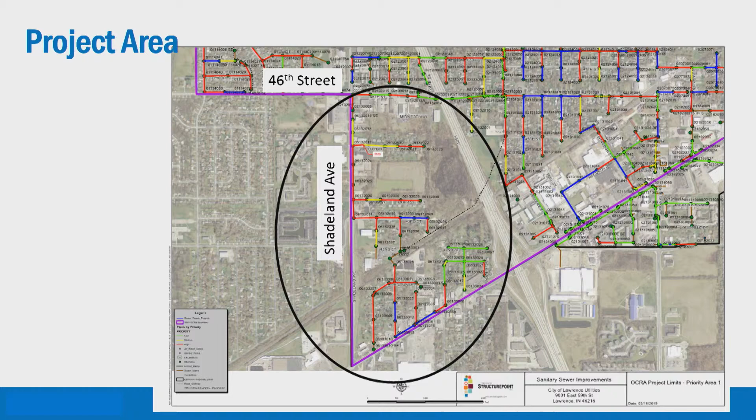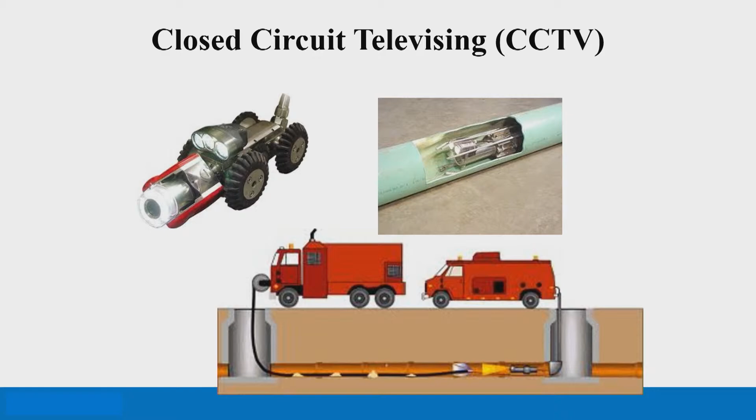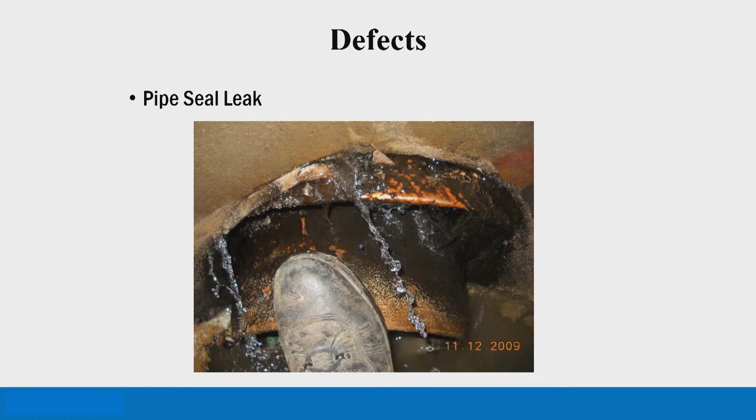So I'm going to go through some images of things we can see in the sewers. This shows water leaking in where a pipe enters a manhole. All of this water, if you haven't heard the term before, we call infiltration and inflow. That can come from rainwater or groundwater entering your sewer system, and that's extra water that the city needs to pay to treat. So anytime we can get this clear water out of the sewer, the better from a bottom line budget standpoint.

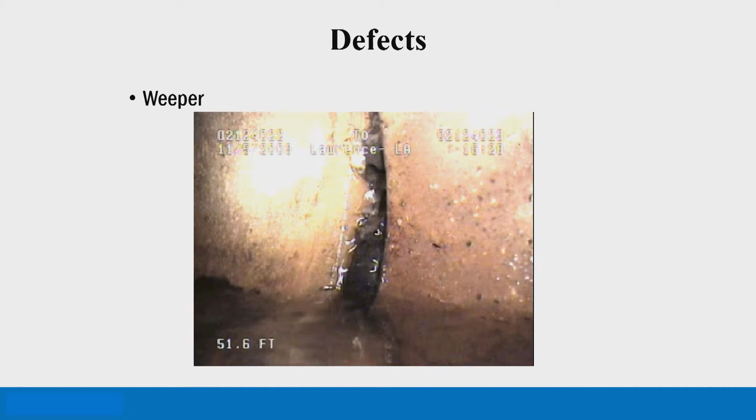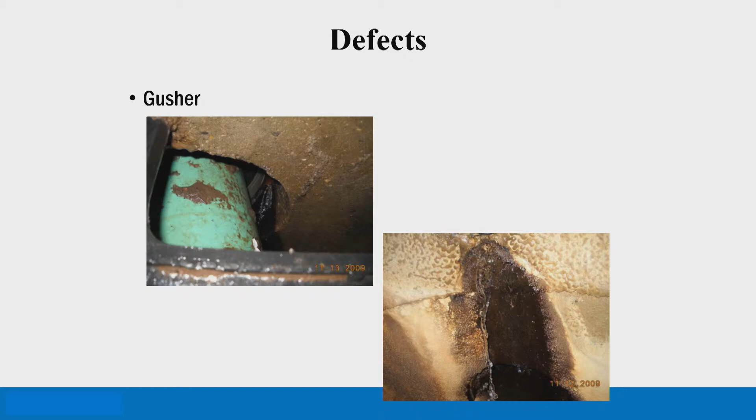There are different types of water that can come in. We call them weepers - like someone crying, a little drip. But then you can get water that's constantly flowing, almost like it's pressurized - again, that's groundwater coming in. We also see ones called gushers. In this area, we did see a lot of infiltration, a lot of clear water coming in.

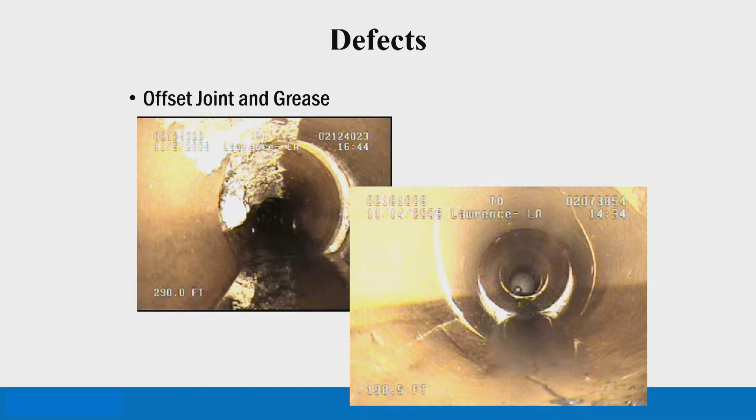We also see with this type of pipe material some offset joints, just as the ground shifts and over time the pipe shifts around, allowing movement of soil and water. And then there's grease buildup from people putting things down the drain, restaurants or other things, which can cause blockages in the sewer.

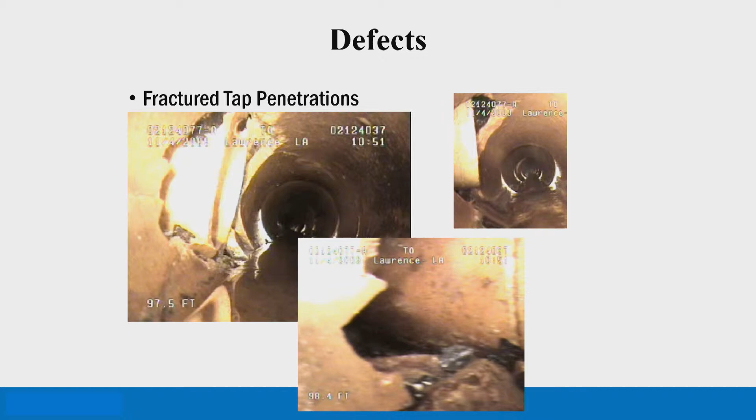Sometimes new developments come in and tap these pipes to put in new laterals, and they may not do it properly, so they can cause the pipe to crack and break around that penetration. The pipe, as it settles over time, can get fractures and cracks. And then gravel deposits, silt, sand - anything that comes in can settle out and take up capacity in the sewer.

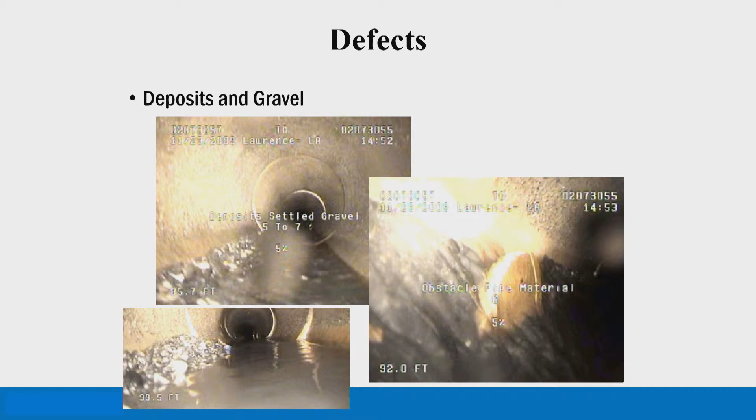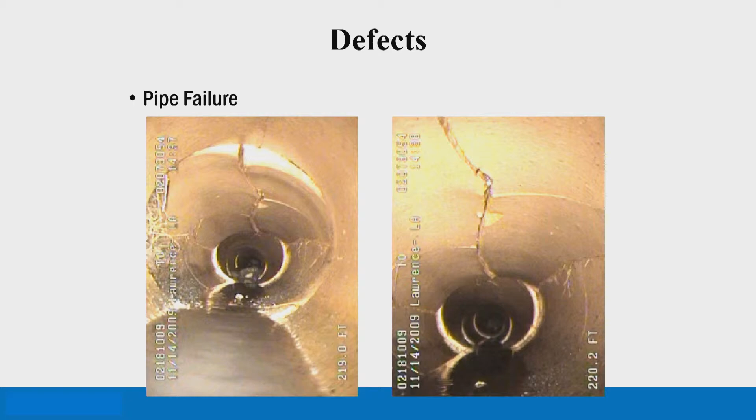There are a couple locations in this area where we saw some higher priority defects - we call these pipe failure. The sewer isn't necessarily collapsed, but it's getting to the point where you get a little concerned, especially in terms of a sinkhole or something forming above ground that you'd be able to see. I'll talk through how we'll address some of those we've seen.

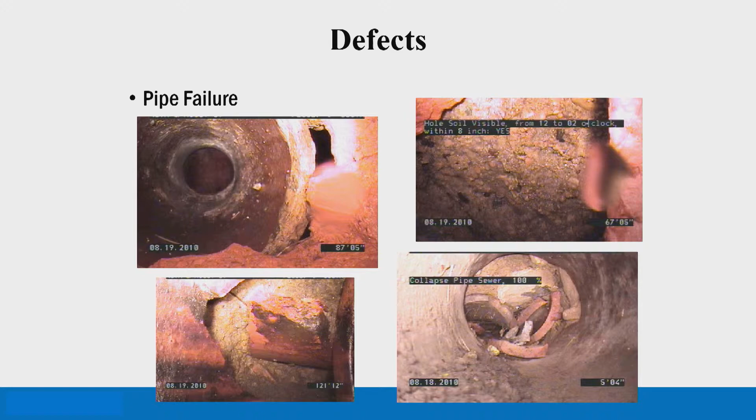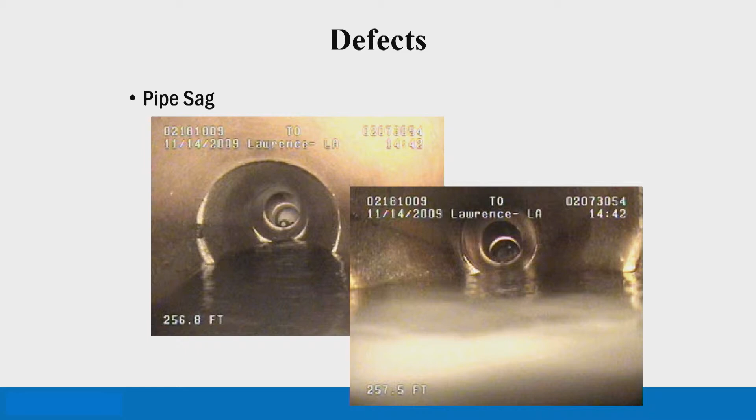One other thing you can see is a sag. As the different pipe sections settle, you'll see the water level higher in certain sections. What that does is take away from the capacity of wastewater being in the pipe.

So how do we address these issues we're seeing in that Elmhurst Lift Station service area basin? We can do dig up and repair work, which is obviously more noticeable above ground and has more environmental impact on residents. We try not to do as much surface excavation, but if we need to - and there were 5 pipe segments - we'll need to dig up about a 10-foot long segment to replace that section of sewer.

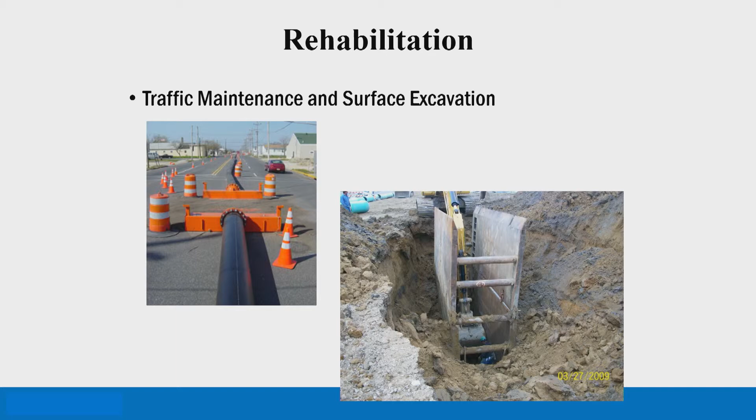This is what you'll see from above ground. You'll see some piping, that black pipe on the left, high-density polyethylene pipe. That's our bypass piping, so we need to bypass flow around while we're working. You might also see some trench boxes and open excavation like this.

Primarily what we'll be doing in this area is called trenchless rehabilitation, where we do all the work from above ground. We insert a sort of pipe within a pipe, inflate it, and roll it out into the sewer using hot water or steam. We can cure it, it hardens, and becomes its own structural pipe within the existing pipe cavity. So we're really replacing them, but we don't have to do any dig up work.

We've done projects like this throughout the city of Lawrence over the past several years. We just did the one in the Lawrence Trades District area using this same methodology. It's a proven technology, and it'll seal up all of those areas where that clear water is coming in.

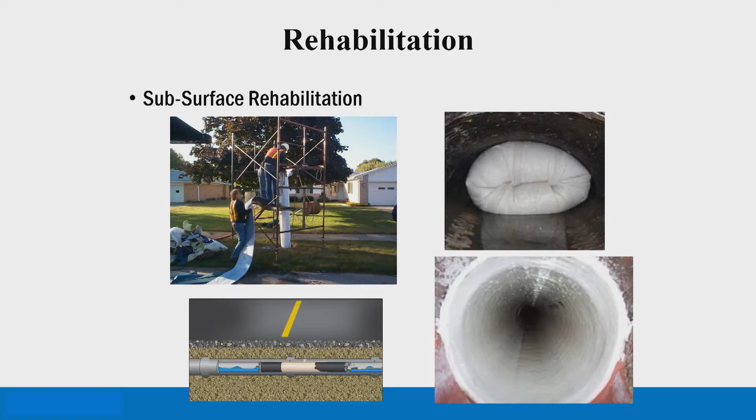Is it okay to ask questions at this point? Sure. What actually happens to the existing pipe - I'm assuming it goes on the outside? The new pipe goes on the inside of the existing pipe.

So the old pipe is still on the outside, and it can continue deteriorating or crumbling over time. But even if it completely falls apart, this new pipe is strong enough to hold up the soil loads and the road loads or car loads, anything above it. It's basically its own standalone pipe.

It starts off soft, almost like a felt, with a couple layers. You inject a resin in it, and the resin's activated by the hot water or steam. That pressurizes it, pushes it up against the existing walls of the pipe, and then it cures. It just takes some time, and it hardens and becomes really hard.

And you said we have already done this process another place in Lawrence - when did we do it? We did some in 2012, then some more around 2014, 15, and then we just finished up the Trades District area in 2017 and early 2018.

Using the same process, we even did a section in the Trades District project that went under the railroad, so it's strong enough to withhold the load of a train. They can just make it thicker to hold a heavier load. They're proven to 50 years, but they say up to 100 years.

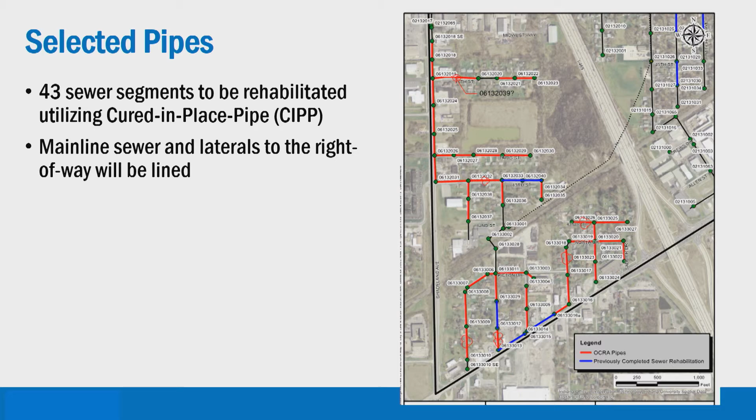Just a final thing here, why it's really important that the City of Lawrence goes after this grant and fixes these sewers. We obviously want to eliminate sanitary sewer overflows - that's what SSO stands for. That's when, after a rainstorm, you see sewage coming up out of manholes onto our streets, and we don't want to encounter that from a public health and safety standpoint. So that's why we want to seal up our sewers and not have them filling up with rainwater, and then overflowing.

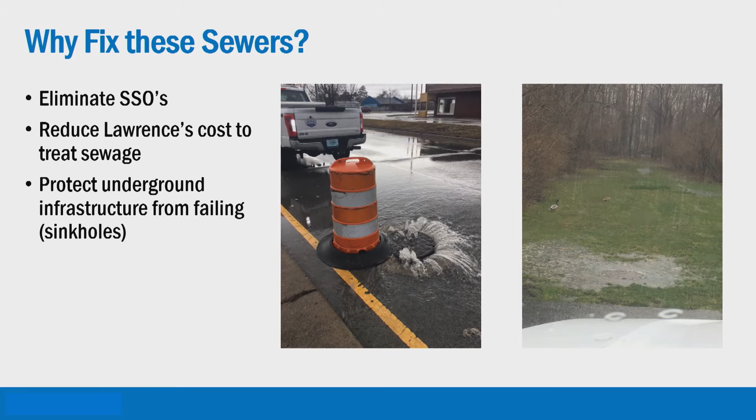As I mentioned in the beginning, by sealing up the sewers and making them watertight, it reduces Lawrence's cost to treat the sewage, which is helpful for your bottom line. Also, protecting our underground infrastructure from failing protects us from sinkholes. The roads are only as good as what's underneath them, how well that soil has been compacted, and if there's a pipe under there that is failing and soil is going into that pipe, that's where you get the problems. So it's really important, it's really imperative - this is a high priority section for the City of Lawrence.

At this point, we'll just open it up to any questions or any public comments about going after this grant.

I had one quick question - has anyone come up with a number on the amount of money we will save once we implement this new system? I'm working on putting that together through the work we did putting that sanitary sewer evaluation report together in 2009.

We did flow metering in all of what we call the sewer basins. We really tried to capture what the normal sewer flow is going through, and then when it rains, what is the flow going through. That's the extra water you're treating that we're going to be looking to remove.

I'm pulling those numbers from that data together, and that'll be part of our grant application to really highlight to OCRA how much water we'll be keeping out, and therefore saving by not having to pump it, treat it, or send it to Citizens.

I'm working on getting that number together, and I should have that for the next public hearing. But I'll make sure you have that information.

We'd also like to point out, with this problem of clear water, we always recommend that everyone disconnect their sump pumps. You don't want that stormwater or groundwater coming into the sewer. So make sure your sump pumps are not connected to the sewer - we always recommend that.